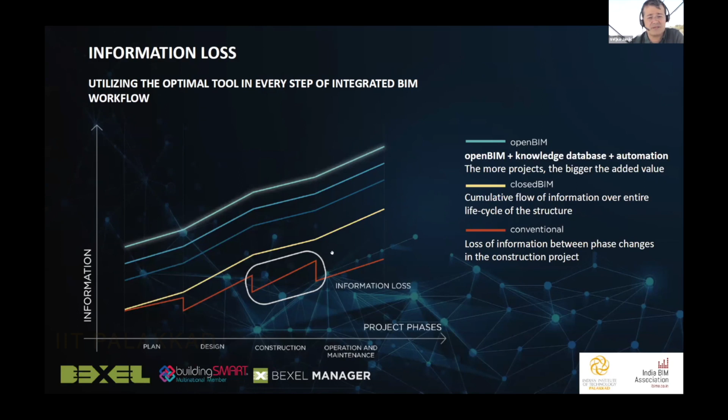And that's why for the last 25 years within buildingSMART International, we are promoting open BIM. It allows flexibility, openness, it allows you to easily change or switch your processes if something else is available on the market. And very importantly, it allows you to store the data in a proper, open format and be 100% sure that you can reuse that information, let's say for facility maintenance or renovation in 20, 30 years.

The challenge of the solution in this approach is to switch the construction process from manual, tedious work to something Henry Ford developed 120 years ago: assembly line principles, a factory approach, where you organize the processes in a flow line and, like in a factory, automate all repetitive and time-consuming tasks. It brings a lot of optimization and increases productivity, because everybody is working at the same pace, in a similar manner, and then we really have additional time for creativity, flexibility, and innovation.

So the idea is also to capture expert logic. The construction industry is very complex, and in order to be successful, we really need to combine the knowledge, experience, and creativity of engineers and experts with massive computing power and big data management.

When we are talking about open BIM and IFC, there are of course people who say it's not ideal, it should be improved in some areas. But to be honest, in my opinion, this is the single greatest achievement in the digitalization of the construction industry in the last 20 years. Whenever somebody says it should be improved, of course everything could be improved, but I used to quote Churchill, who said democracy is the worst form of government except for all those other forms that have been tried from time to time.

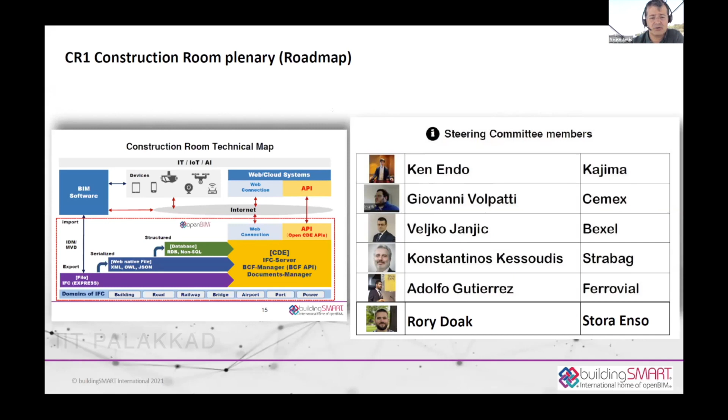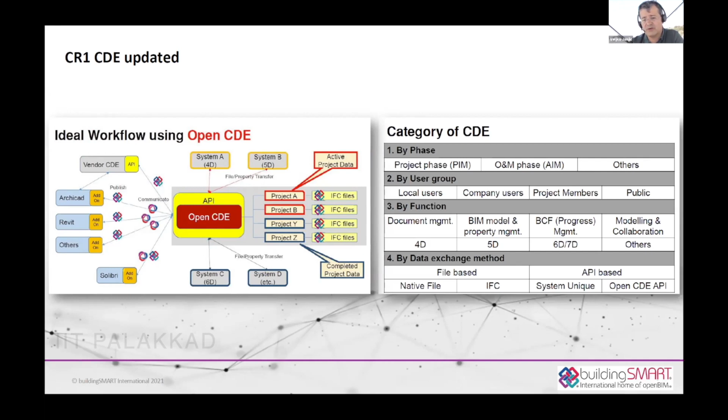I'm currently also the technical lead within the steering committee and coordinating development of all, let's say, MVDs, 4D, 5D templates and standards for implementation of IFC in the construction stage. We are also focusing not just on the 3D models and data in the construction stage, but for us, very important are 5D, 6D, and 4D, of course, in order to have a fully successful implementation of them.

So what we are working on currently is a model view definition for 4D and 5D. Then BIM-based cost classifications, cost items according to ISO 12006 Part 3. Very important, BIM-based construction schedule according to ISO 21511. So today, unfortunately, planners are, let's say, used to developing schedules in their own way, and there are no standardized ways for developing schedules and so on.

ISO 21511 gives you an idea how to standardize schedules, how to standardize processes. There is also a very great basis for location-based scheduling. So at the end, the conclusion is that schedules are not open format things, but they have to be standardized like everything we standardize in the construction industry. And that will tremendously help in optimal processes, optimal schedules, and optimal executions and

monitoring of the schedules. We are also working on IFC properties for 4D, 5D, look-ahead plans and BIM-based progress monitoring, and workflows in the tendering stage. Here are examples from Germany and Spain. So these are formats for the tendering stage.

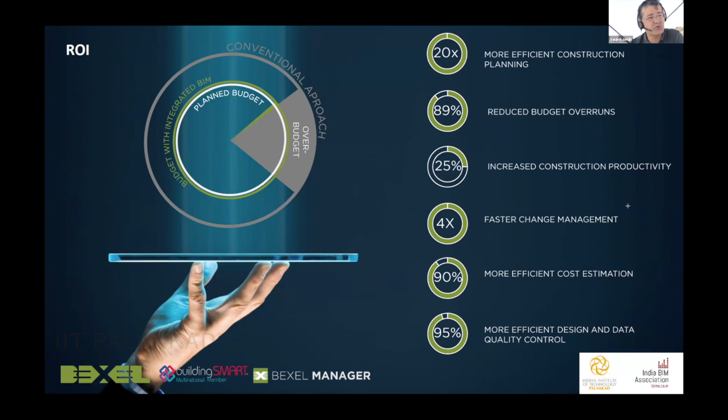So by using BIM, they are 20 times more efficient in construction planning, 89% reduced budget overruns, increased construction productivity by 25%, faster change management, efficient cost estimation, and design and data control. So we should always focus on those results, not to add something new. We should replace existing or improve existing workflows.

What are the key factors for successful BIM implementation? They are a result-oriented approach, fit for purpose, information-driven requirements. So always start from the end, and something which is not going to be used in reports, in analysis, and so on, we really don't need.

Sometimes I saw spreadsheets with, let's say, 200 properties required from the designer to develop and attach to each element, and then the client is using only 10 or 15 of those properties in any analysis. So okay, we overload the work, have slower processes, updates are done much slower, and we don't use the information at all. So this is something that should be avoided.

In order to standardize and digitalize workflows, we need to develop very professional data templates. And unfortunately, I have to say that on more than 95% of the projects around the world, templates are not developed. So it's like, okay, we are trying to be more firefighters than managers, and do not identify, do not standardize, and so on. And of course, we are going to face a number of challenges during the execution.

So here are some of the important data templates. One I already mentioned, information delivery specification, but also the clash matrix is very important, cost classification and rules of measurement, BIM cost and productivity databases. Again, I already mentioned this, the construction schedule template, where you will clearly define the hierarchy of your tasks, how relationships are developed, naming conventions, and everything else. Of course, as-built documentation, linking templates, and facility maintenance planning templates.

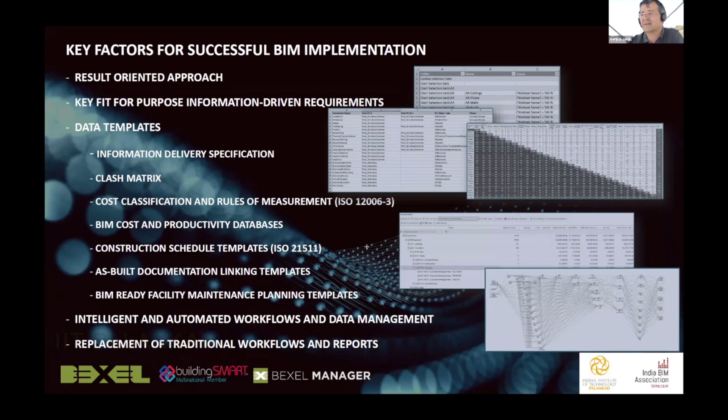So we need to really replace, so produce the Gantt chart from the BIM model, or produce the schedule from the BIM model, not produce the schedule manually and then attach the tasks to the BIM elements. This is okay, nice, maybe it looks good, but it's just additional work, and we didn't use BIM for planning. We are just manually connecting activities with the elements.

So in Bexel Manager, we have a single source of truth. This is maybe a key benefit in successful BIM implementation. Everything is there: BIM models, clashes, QTOs, costs, schedules, progress monitoring, zones, templates, a knowledge-based management system. We are IFC certified by buildingSMART, so we can easily read and export IFC data. We support BCF, classification, and, also very important, have a fully open API, so you can literally access the data and easily transfer it or connect it with any other tools or platforms.

So here are some workflows. One is data validation. You just load the BIM model, load the template from JSON or any other third-party solution or Excel, and the system will automatically produce reports. Without this approach, we would need months and months of manual data checks, which is of course something very difficult.

Also, within clash detection, we are talking about hard clashes, clearance, containment, and duplicates. One of the very interesting things is containment, which allows users to generate very interesting clashes within the BIM models. So these are the initiatives, the activities and works which are important in the design stage.

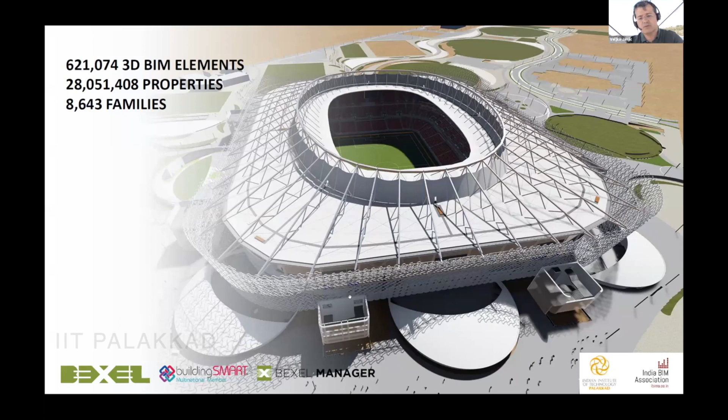Now, here is one of the automated intelligent workflows in Bexel Manager. Of course, there are plenty of them. The workflow has 5 steps. So in this case, we have geometry data and metadata verification. So first, we need to check the data. A lot of times we saw the situation where we start doing some analysis, but we didn't check the quality of existing data. And of course, it's going to be garbage in, garbage out. So first, a very thorough check of all information. Based on those checks, we make a decision: can we proceed, or in which areas we can proceed.

And the system, I will mention this briefly later, about those levels of 4D and 5D BIM. So automatically create cost classifications, not manually create cost versions. Then this is according to ISO 21511: define zones, methodologies, and creation templates, and automatically create schedules with 20, 50,000 tasks with all resources and so on. So the idea is to use the information already available, and in an intelligent way, by capturing and connecting expert logic, automatically do most of the work.

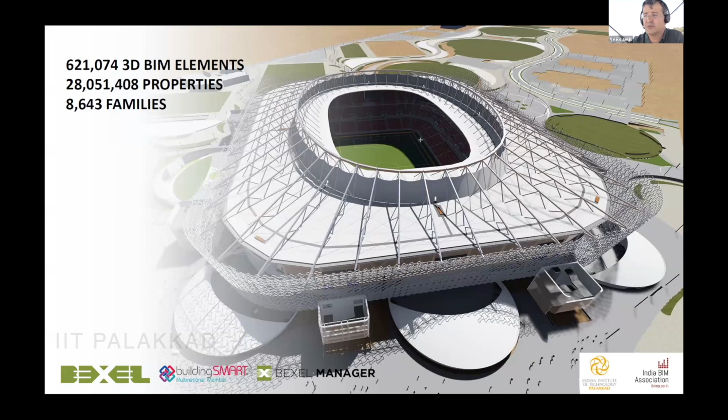So I just want to show you one example. This is a FIFA football stadium for the next World Cup. It is finished now, but it had more than 600,000 elements, 28 million properties, 8,600 families, and schedule and cost and all other calculations were done manually. So we had an extremely huge amount of information, and we are not using this. We simply say, okay, now we forget this.

Let's manually create 20,000 tasks. And of course, we cannot attach quantities of resources or materials which have to be done on those tasks. We cannot properly define relationships. And whenever design is changed, and we were BIM managers on this project, it was changed twice a week. Nobody had time to change and update this. So this was a traditional approach.

So fortunately, later, a more intelligent approach was used. But this is the situation today. So we have extremely detailed models and do not use them. And when you ask the contractors, in reality, Excel is still the most used tool for a monthly payment certificate. Gantt charts are, let's say, done in Project or Primavera without any relationship with BIM models and so on. So the vision is to use already available data in an intelligent way.

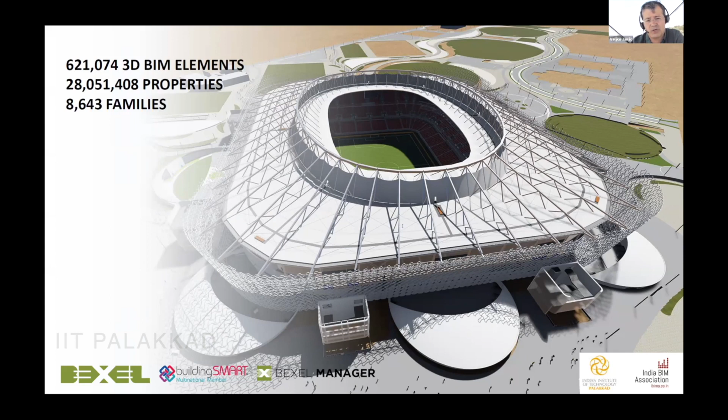And when somebody says, okay, yeah, we are using BIM for cost estimation, a lot of manual tedious work, a lot of mistakes could happen in this process. And whenever design is changed, you simply at the end say, okay, I cannot cope with the changes. We just hope that it's more or less similar to the previous version, and hope that nobody will complain about this and so on.

So the next process is, let's say, 10 to 20 times faster, where we have BIM cost databases, and then attach the cost codes to the items and the elements. And in the cost databases, for example, in Bexel, we also have those formulas, how the system will calculate the quantities, let's say twice multiply area for certain formworks and so on. And also have the identification, which allows the system to automatically, by using that code, connect the cost items with the elements. And if we have also attached resource data, we call this auto assign process. So on a single button, automatically calculate cost items.

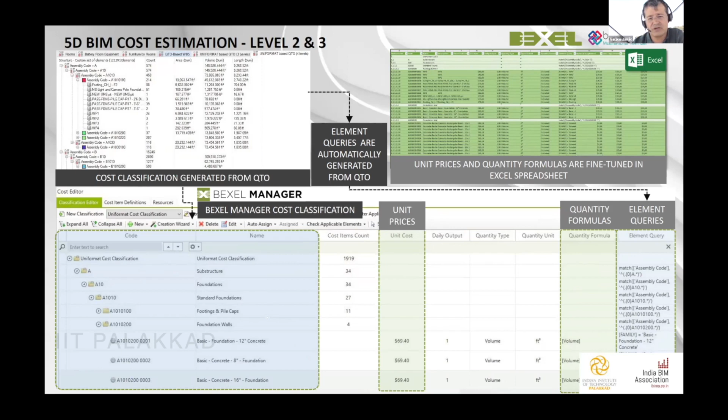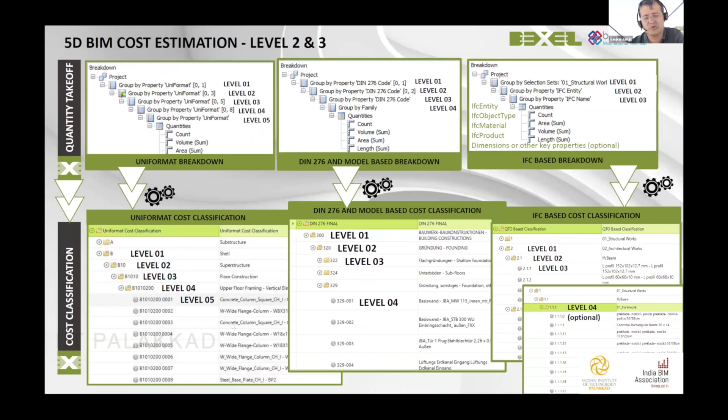So we are not manually connecting the elements with the tasks. Here are some examples in Germany, whether it's IFC based, Uniformat, Uniclass, or any other standard available at the market. The same goes with 4D BIM scheduling.

Again, we have a situation where we manually develop schedules, tremendous manual work without using any useful information from the BIM model, and then linking the elements with the tasks, spending so much time to do that.

So one benefit is visualization, but these tasks are manually created. They don't have any quantities, resources, or costs. Or even if costs are added, again, it's just '3 million' - nobody calculated the cost, just put the end result, which is, of course, not very accurate.

Manually, selection sets are created. It's not aligned with the schedule. So let's say we could have a sprinkler in the schedule but not in the BIM model, or the opposite - we forgot to add a sprinkler, and so on. So more or less, very tedious manual work.

The benefit is nice for simulation. Unfortunately, when we talk today about 4D BIM scheduling, 80-90% of all companies just see this. And that's why the people doing 4D are not planners - they are more like marketing guys who just do nice work, like nice rendering.

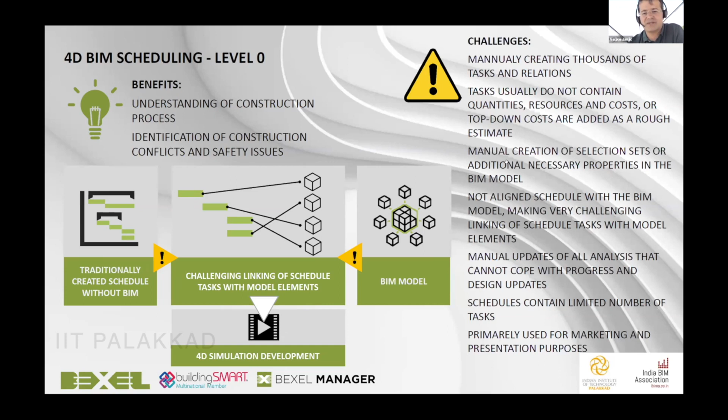Planners still do everything in Project or Primavera, and those are the big guys and main guys in the company. 4D guys are unfortunately sometimes just entertainers, and we should avoid this. We should really come together as a team of experts, with the guys who know 4D well becoming the leading planning team of the company.

So here is another benefit - auto matching, which is useful. If you have properly defined processes, let's say in Bexel Manager, you can connect each property in the elements with the name of the task or any property within the task, and automatically match those things.

The problem again is that we need to manually create the schedule and then do the auto matching. So we've just skipped one tedious process - matching elements with tasks - but the schedule is not optimized because it was defined manually. There's no line of balance, no flow lines, no location-based scheduling, and so on. So the old traditional flaws and issues remain.

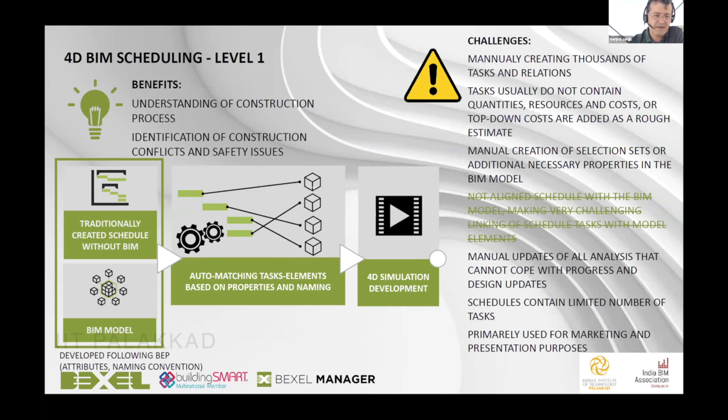Scheduling level 2 is really BIM-based scheduling, based on the BIM data. The system can automatically create custom breakdown structures, import cost versions, and automatically create hundreds of thousands of tasks sometimes. All those tasks have cost information, relationships, and so on.

And we strongly believe that this is how schedules will be done in the future. We have now hundreds, even thousands of projects where this is implemented on totally different types - from infrastructure, hotels, oil and gas projects, and so on, implemented across totally different markets.

And it shows that by using those ISO-based workflows, there could be a tremendous change. In terms of time, this process is 20 to 100 times faster, more reliable, and updates are streamlined - the system will automatically create new tasks when the model is updated.

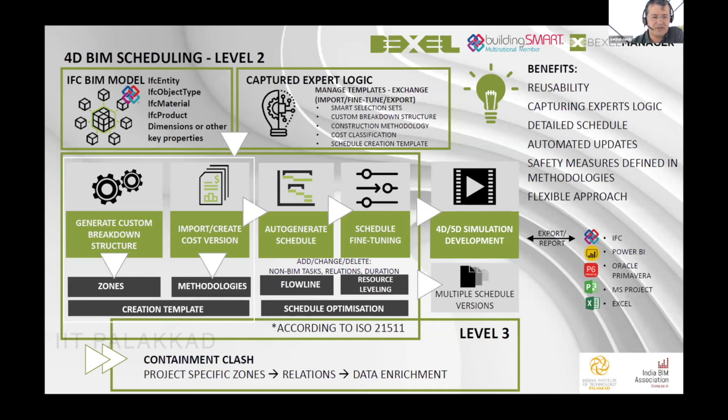The last level of level 3 is where, by using containment clash as a feature and functionality, the system can automatically identify all elements in a certain zone or space and automatically distribute the elements to the activities. So these are ways how flow lines could look like.

This is an example of one football stadium where, in a Bexel BIM-based methodology system, by just having 120 nodes on 6 levels with zones and methodologies for how the works are done, we capture the expert logic. The system automatically creates more than 50,000 tasks and relationships. Traditionally, to do that you would need more than a year, and it wouldn't be so detailed.

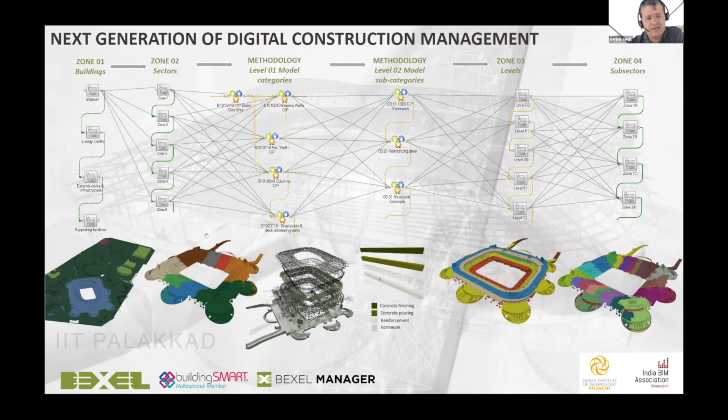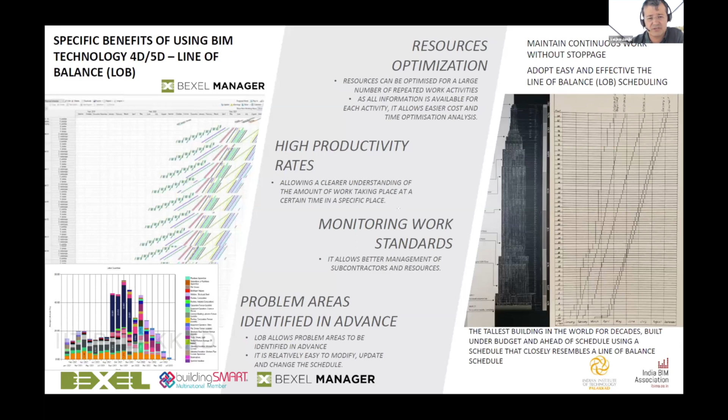Here is an example in the command center in Bexel Manager. I see a flow line of what has to be done, and here in a Gantt chart you see all baseline costs, total cost, earned value, resource analysis, cash flow, and at the end visualization, which is just a nice-to-have feature, but these are the ways how we manage the project.

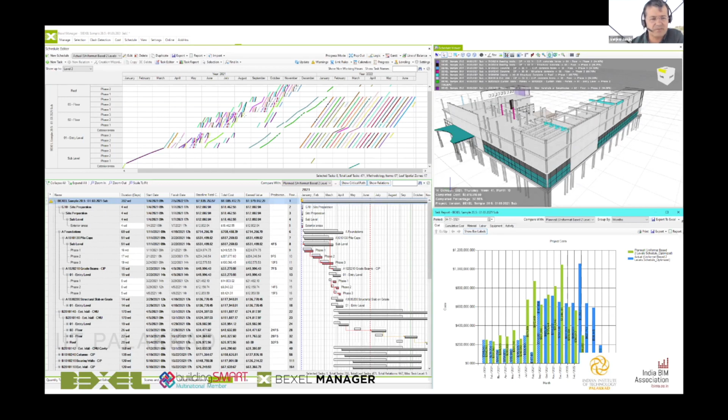Of course, we can identify some issues with this 4D simulation, but they are not the core of our process. By having this integrated, monthly payment certificates, look-ahead plans, and everything else could be done automatically. Here are links to videos, and the same process applies to progress monitoring.

Again, when somebody says level 0, you usually click on certain elements in the BIM model, check the quantities, have some 2D sheets where finished areas are hatched, do a manual element selection of the activities, and in Excel calculate the quantities of the works. Labor intensive, but I'll be honest, even this level 0 is good for a beginning.

Unfortunately, on 90% of projects globally, even with good BIM models and decent 4D simulations, nobody is using BIM for progress monitoring. So even this approach is innovative for certain companies.

Level 1 is where, by selecting the elements, the system automatically calculates the progress and produces certain 4D, 5D simulations. Still labor intensive calculations, manual payment certificates, no resource productivity analysis, but we have a more accurate visualization, and we could also produce plan versus actual simulations.

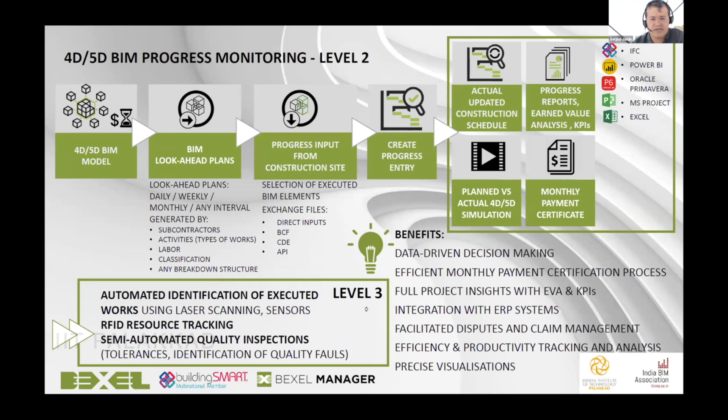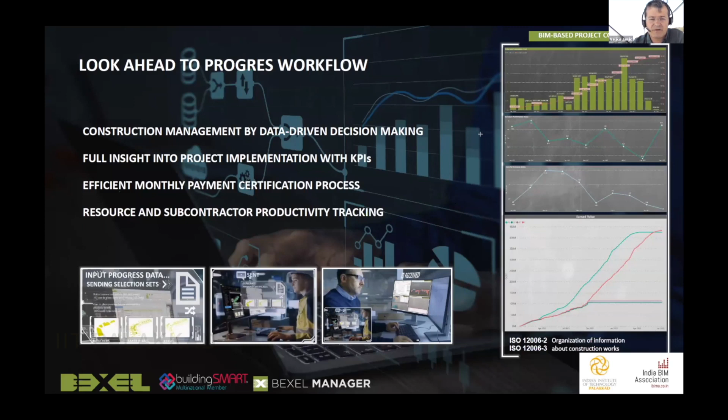As mentioned, all those workflows and videos are available, and the presentation will be sent to you. These are the visions of look-ahead workflows, progress workflows, and how we evaluate the end success of BIM implementation through reports.

So the key questions are: sit down with anybody and ask, are you producing cost analysis from BIM or not? Are schedules produced manually or directly in BIM? Are clash detections done in the traditional way, and are quantifications done traditionally or directly in BIM?

How are you doing earned value analysis and KPI reports? Is progress monitoring entered manually, like someone saying 50% of those works are finished, or is it really accurate data using BIM? The same goes for document checks, portfolio management reports, facility maintenance, and so on.

So the idea is, if the answer is that we have nice BIM models, but most of those analyses—except maybe clash detection—are done traditionally, we cannot talk about a high level of maturity of BIM implementation. We are unfortunately developing BIM just for very limited benefits in project execution.

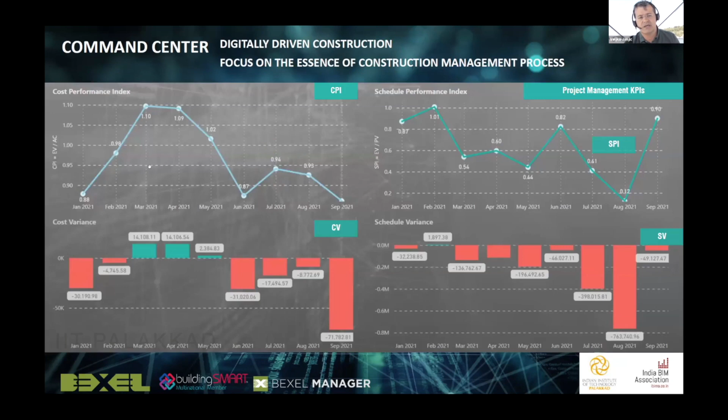The idea is to have a command center, a system in Power BI for example, where every day or every week I see what is my baseline cost, what are my actual costs, what is my earned value, what is my schedule and cost variance—to have all that information and manage the data, to have cost and schedule performance indexes.

So to really be able to control the project, not just using my experience and hoping to have luck to accurately predict something, but really to be able to manage the projects.

So here are some ideas for the next generation of construction management—here are the real benefits: full control of project implementation, improved communication, significantly improved planning, efficient development of quantity takeoff, budget and schedules, timely planning and risk mitigation, better claim management, and of course significant cost and time savings, increased profit margins, and higher return on investment.

All those videos and technologies are available. There is plenty of educational material on the Bexel user area, so everybody can access this information. We have an educational program which is fully free for all academics—professors and students—and our software versions are available for free for educational purposes.

You can watch the virtual Building Smart International Summits, very interesting lectures by myself and my colleagues, where we talked about real examples of how this is implemented. You can also watch Bexel Learn Live advanced workflows, where everything is explained by our experts on real projects.